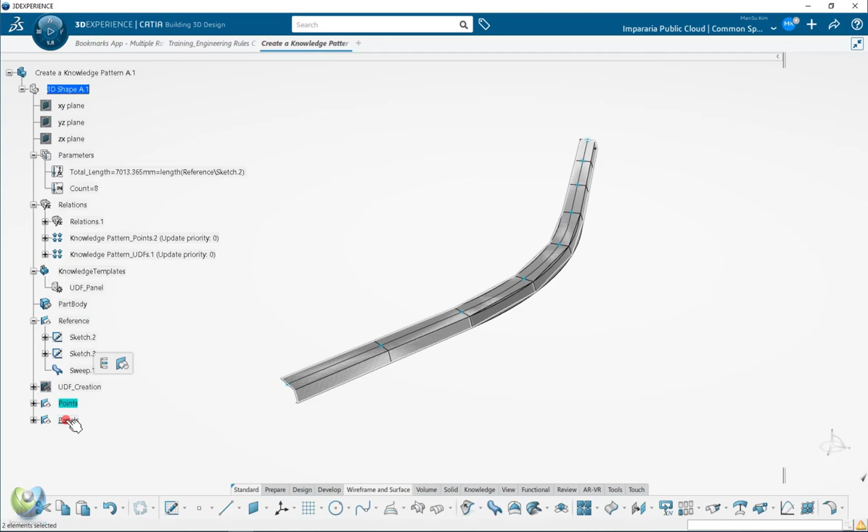Today's topic is about how to use knowledge pattern with the fundamental theories. So let's get started. Actually, I already made this to explain how it works. So you see, once you have the inputs as a reference, let's say we have some panels by the guideline and some sections, and we can create the surface, which is kind of a mesh surface of the panels.

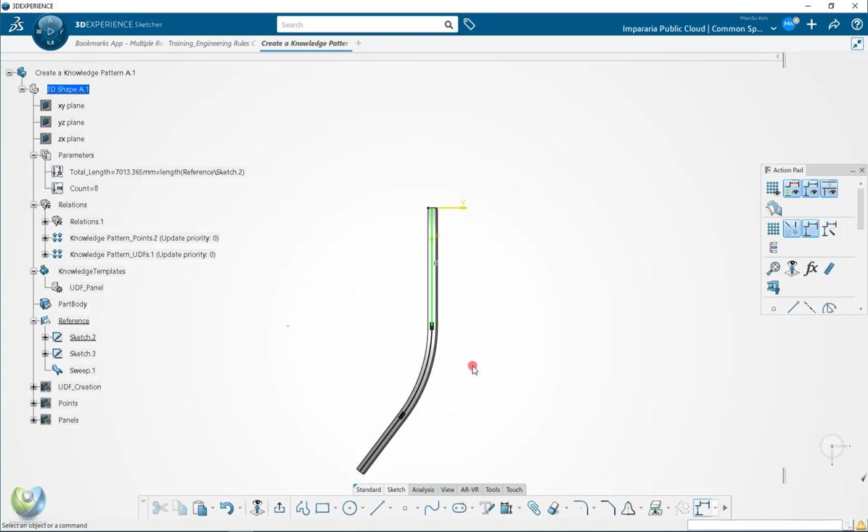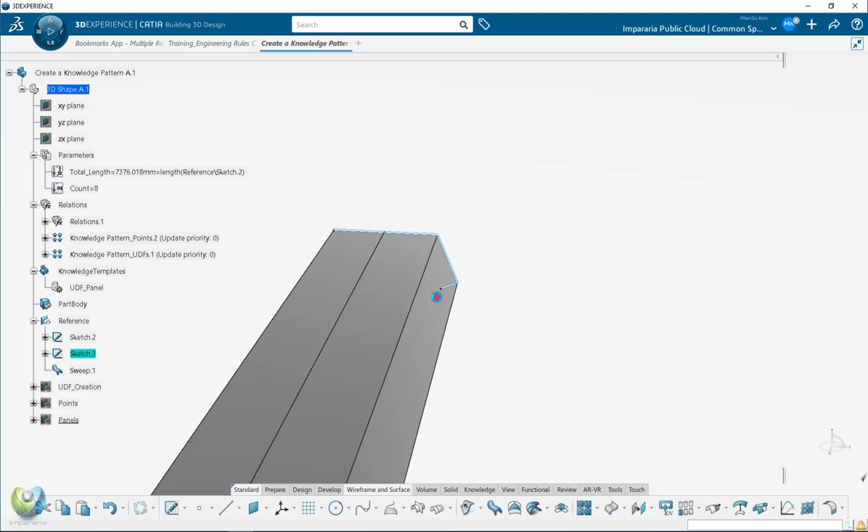And of course, it's parametric, so you can define or change it, and it depends on the project, your shapes. Also, you can bring it from somewhere as well. And you can, of course, change the sections. If you have proper dimensions, you can put the dimensions and some constraints in 3D, of course. So I will just skip that.

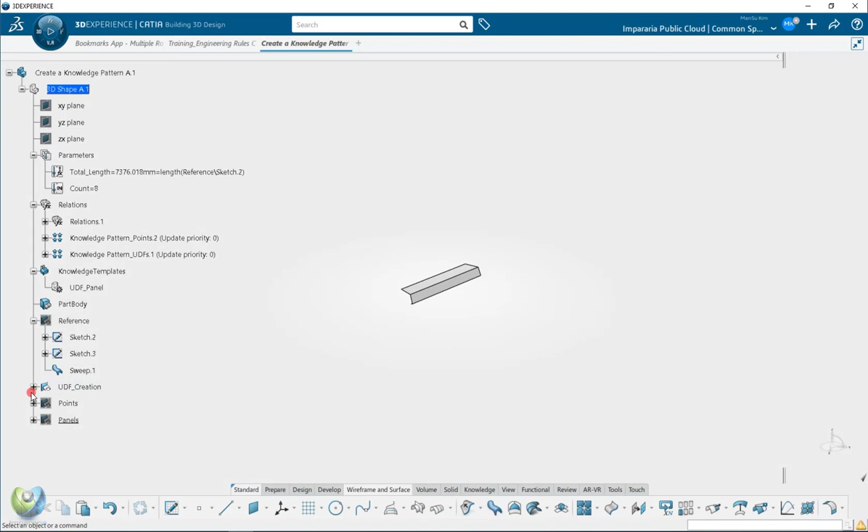Then now, let's say you have the reference surface and the guideline and the section. We start from here, and now you're creating the user defined feature, which is using the inputs. The inputs in this case, for creating this segment panel, we will use the surface and the curve and two more points. So we need to have these two points. It depends on the position. We will keep changing, then update.

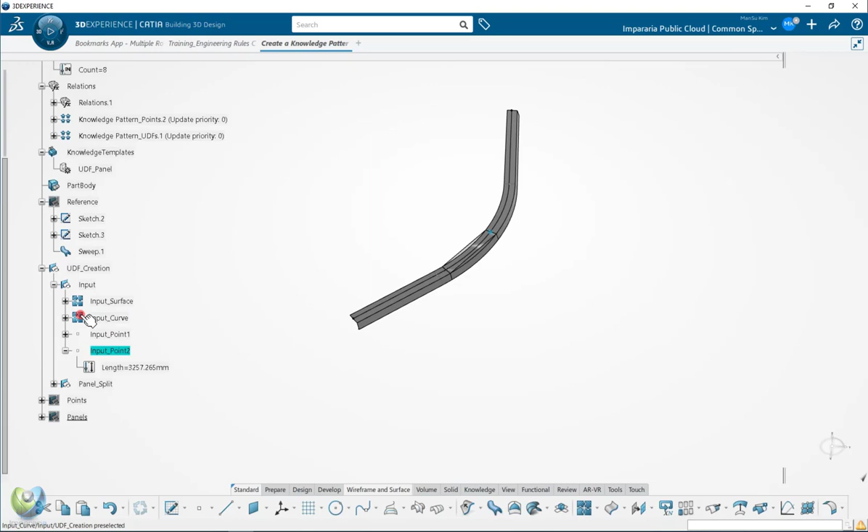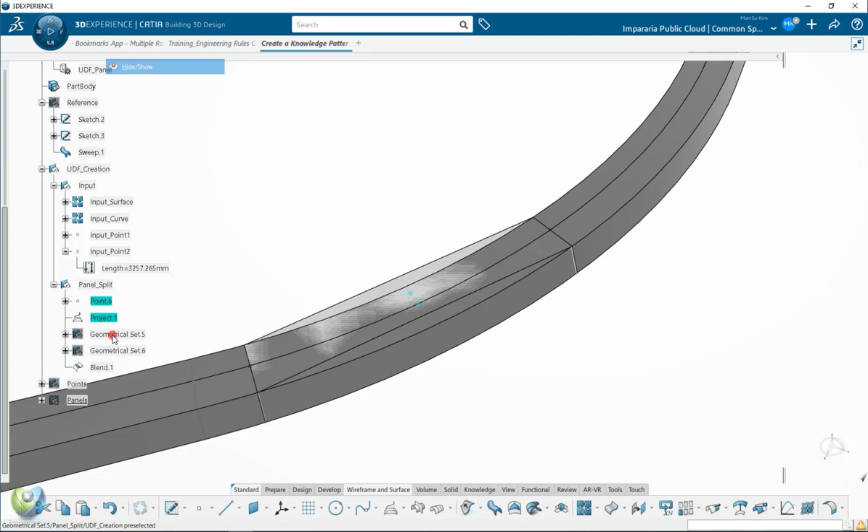So this is input, and from the input we're creating, let's say from here, in the middle, we have an input curve. Then we can create the middle point and project on the curve. Then from here, for each place, you can create a small surface for the intersect line between surface and the face. Same thing at the ending point as well. Then now you have two intersection curves, and you can create the segment.

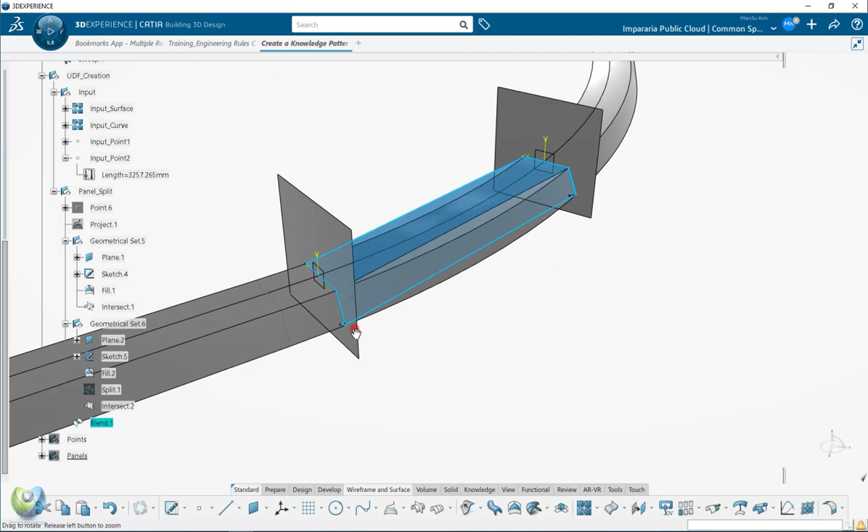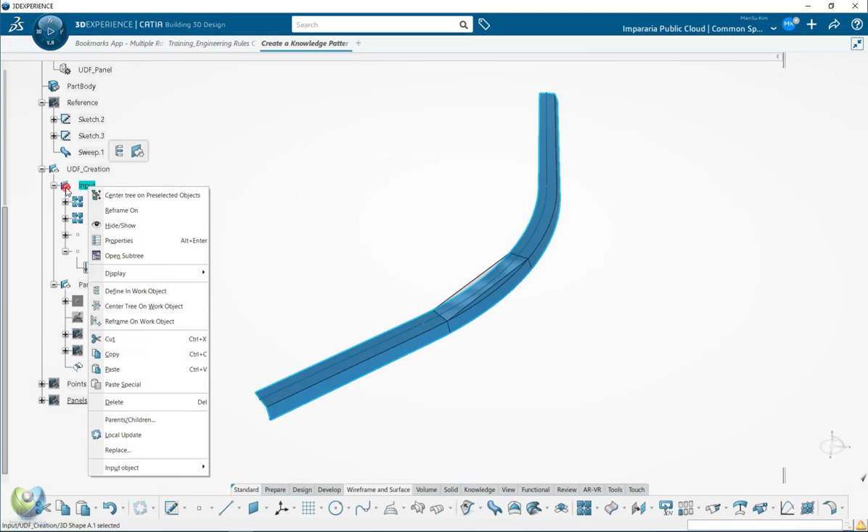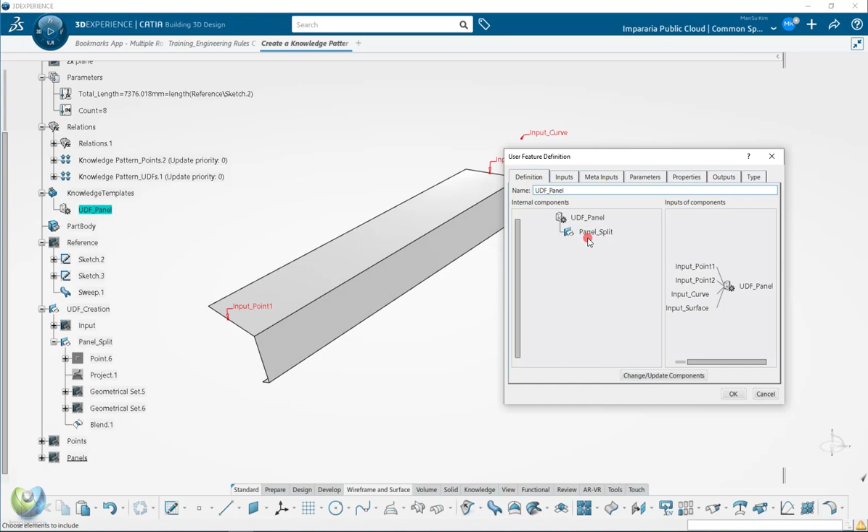Just finish with these basic simple shapes. Of course, you can create other wings, whatever you want, adding more and more. You can decorate more and more. For now, we do it with this kind of shape, and you can create the user feature. So the user feature looks like this. Once your user feature is complete, when you register, you will have the inputs, whose names we are going to use in our script. And output for now is only the shape of this result.

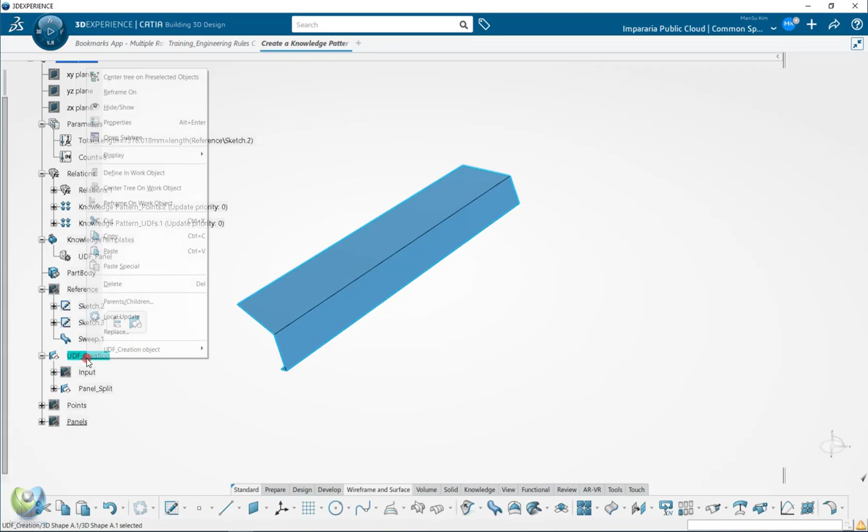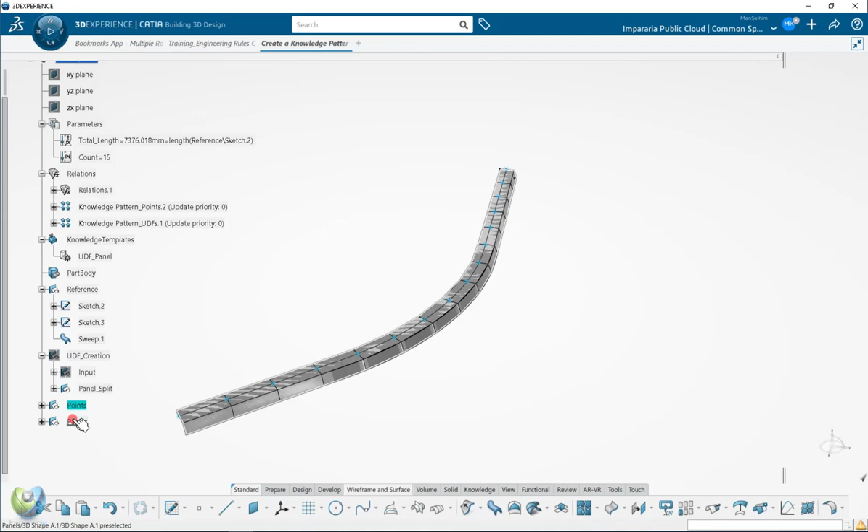Okay. Then now what happens here? I will hide this and show the reference again. Okay. Then whenever you change the count, you will create the points and you will create the panels. You see here, like that. So you can create the segment of each panel. Let's change it again. Okay, so now it's 8 panels, 1, 2, 3, 4, 5, 6, 7, 8, right?

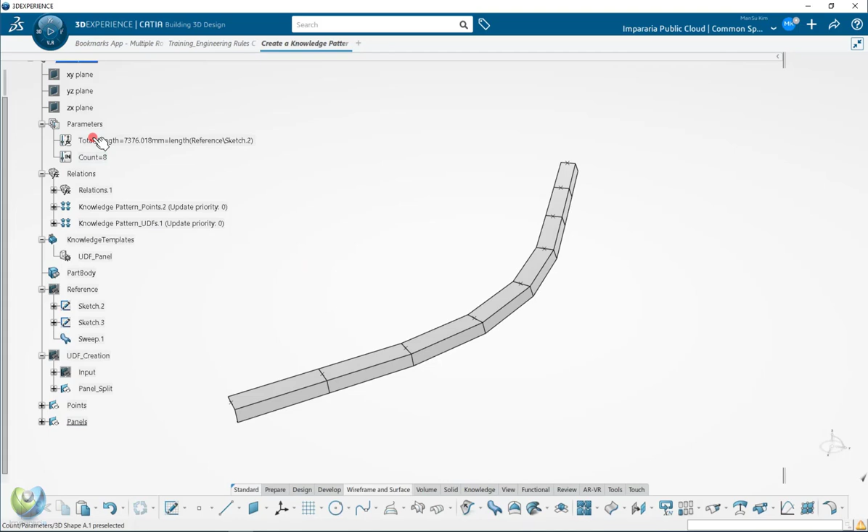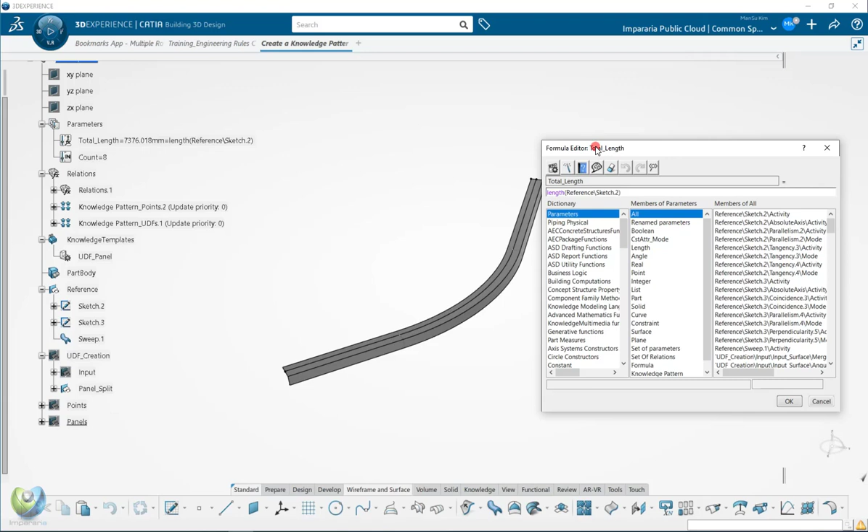So how did we do that? Okay, first, we need to define these two parameters. The first one is I want to measure the total length, because later I want to change the location of a point by the length. So total length you can create using the formula editor, like length with curve. So you can just say measure the curve length, and you can just double click it from the screen. Then this will capture it into the parameter.

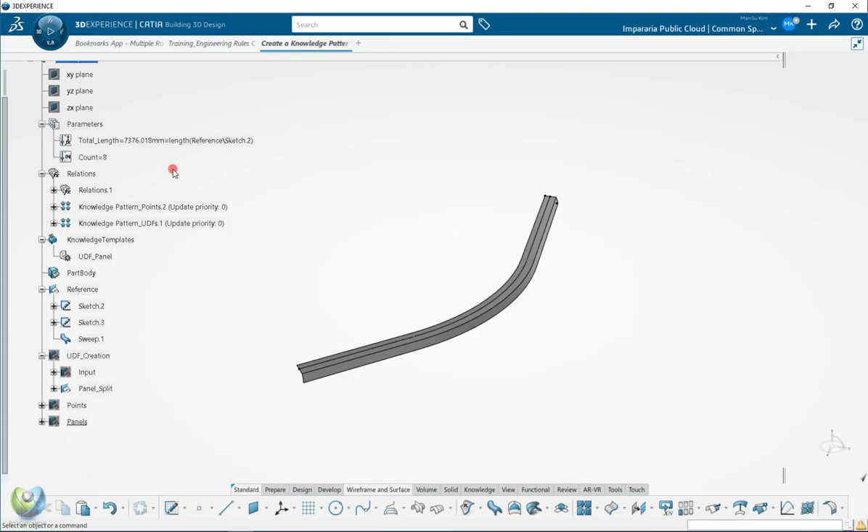Okay, so we put it here, total length, and then I want to control it by count. Of course, you can control it by length, whatever you define yourself. But in this case, I just create it as a count. So now we have a user feature and we have some parameters to control, and we are also creating the geoset to store our output points and panels.

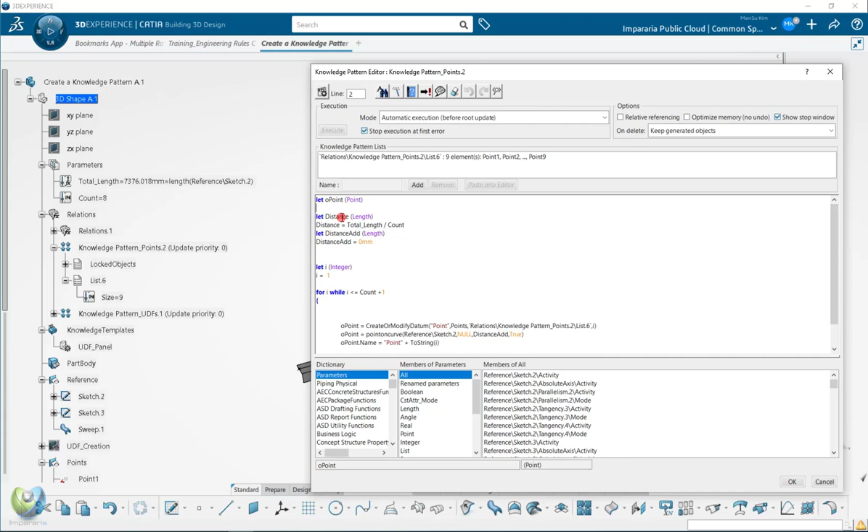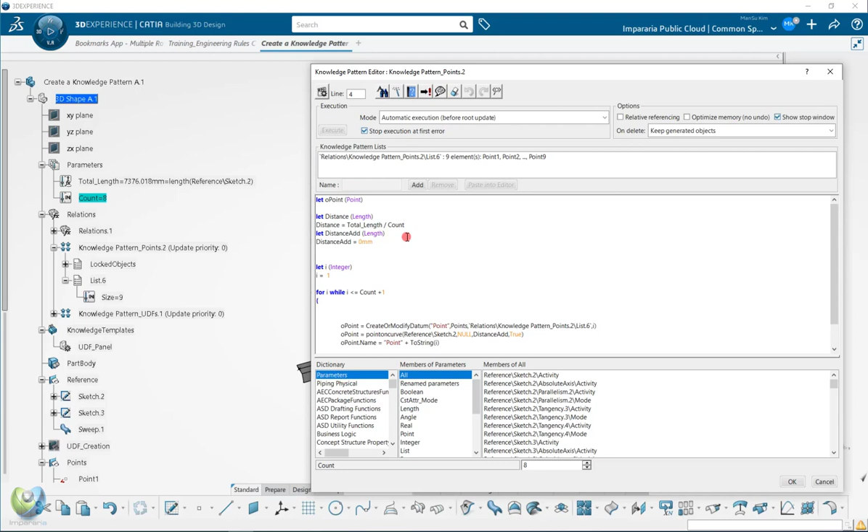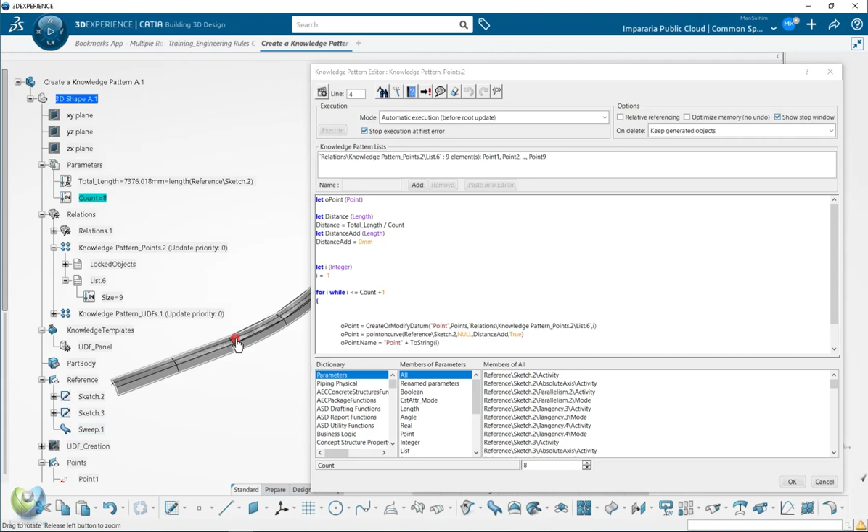Okay, so I created the knowledge pattern 2 times. So what does the knowledge pattern look like? Here I define point, because I want to keep the point moving. So I want to create the point first. The point distance, I define as the total length, which we defined already, divided by count. So you will have the distance of each span, and the first distance we are going to add is 0 millimeter. So starting from 0 millimeter, we'll continue adding the distance, so you will know at which position you will create the point.

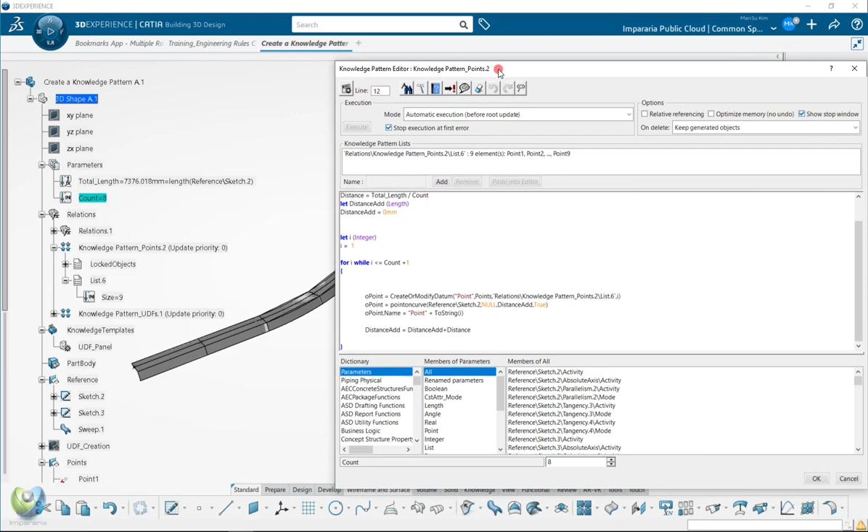Okay. Then now you define the integer. First as 1, and we repeat this loop until count +1. Because you need an additional point, starting point and ending point, there should be one more point. Then now you define by the function create or modify datum. You create the point, and you create the list also here. So while you create this output, your point will be stored in the list. Then you can use this list in another knowledge pattern, continuously working.

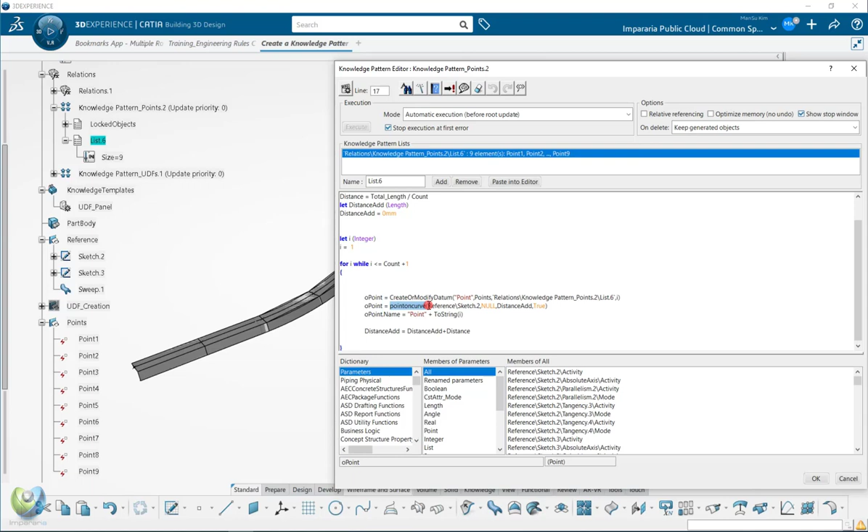Okay. Then now you can create the point. This is a theoretical point. Now you can create the physical point. So the point on curve function will allow you to create the point on the guideline, and the starting point is null, and distance add the first time is 0 millimeter. True direction, 0 millimeter. You can create the point here, and we can put the point name as point plus ToString(I). I is now 1, so the name of the point becomes point 1.

Then now I want to increase the distance add, which you are using here, because I don't want to create the point at the same location. I need to have a distance. So now distance add equals distance add plus distance. So we need to keep adding the distance to distance add in each loop. Okay. So now it's done, and to update automatically, you need to set the automatic update.

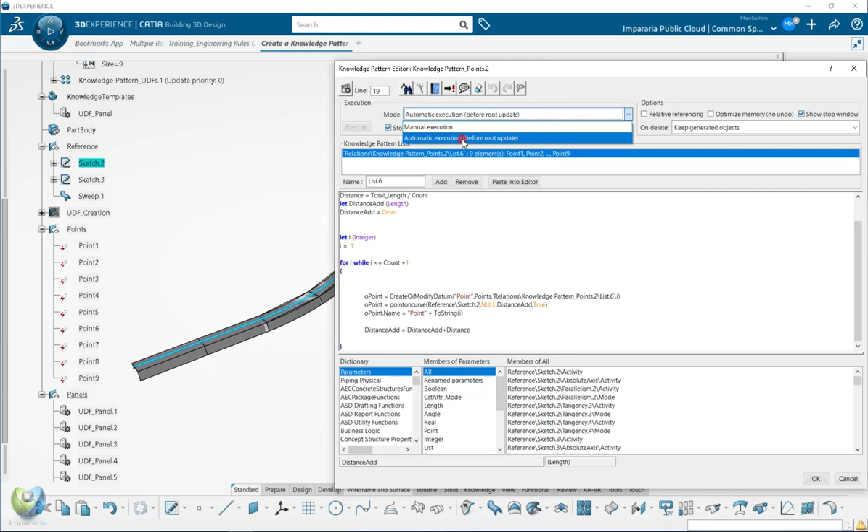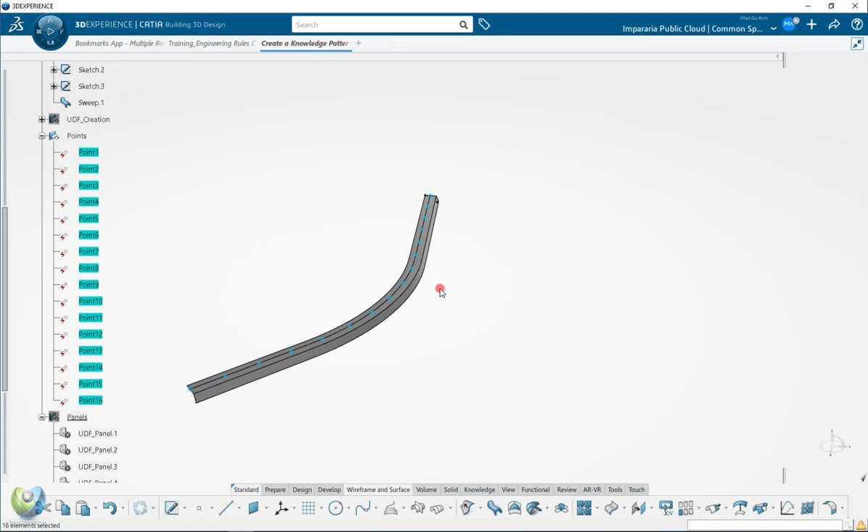That means, what does that mean? Whenever you change and an update is needed for this knowledge pattern, this will update and recreate these points. Of course, when it's reduced, it will be reduced, and if the count needs to increase, this will increase.

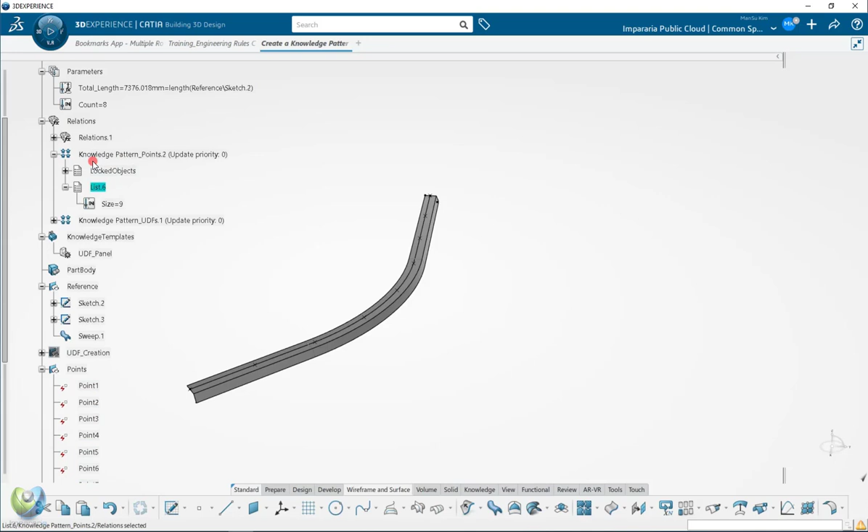But the connectivity for the next step is still working. So this is how we control the knowledge pattern, the points. And in the next step, we want to use these points to instantiate the panels.

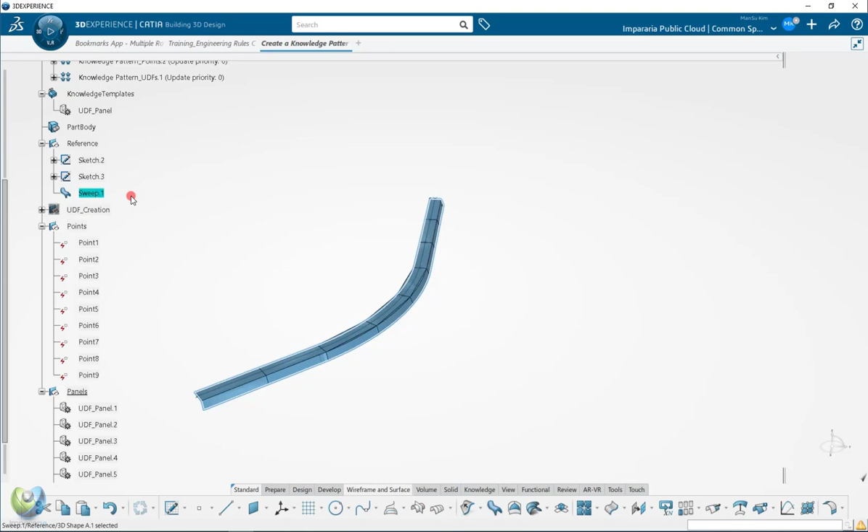So this panel, we need to have 4 inputs, if you remember. The first input is the guideline, the second input is the surface, the third input is point 1, and the fourth input is point 2. So imagine that this will be the first panel, this will be the second panel, and this will be a third panel, and so on until the end. So this is the theory. We want to instantiate our user feature template.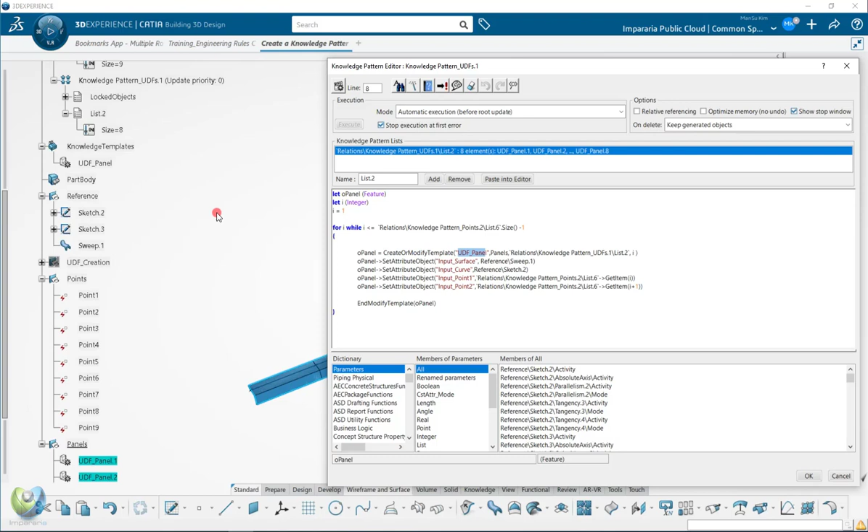So you would continue to 9, but this time you need to remove one time, because the last time is the second set and you should be finished. So I put -1 here. So it's not 9 times, but it will loop 8 times. And for the panel, use this function, create or modify template. So we're going to use the UDF panel, which is here, and we store it in the list here, and I, which in the list is the I count. So the first in the list will be the first UDF, the second will be the second UDF.

Once you define a panel, now it's time to set inputs. So panel set attribute object: surface, curve, point 1, point 2. So we know this one is this one, and the guide curve is this one. And now the point. This is the important part. The point comes from this list. We don't want to click directly because this count will change and disappear. Instead, we use the list and get item I. So I means the first time is 1, and the second time it will be 2. So it will increase.

And as the last input, point 2, that will be the same, from get item I. But in this case, I want to increase by one more point, so it will be the second input. So first input, second input. The next loop will be the first input, second input, like that. So it repeats like this. After finishing your template, we comment the ending of the template. That's it.

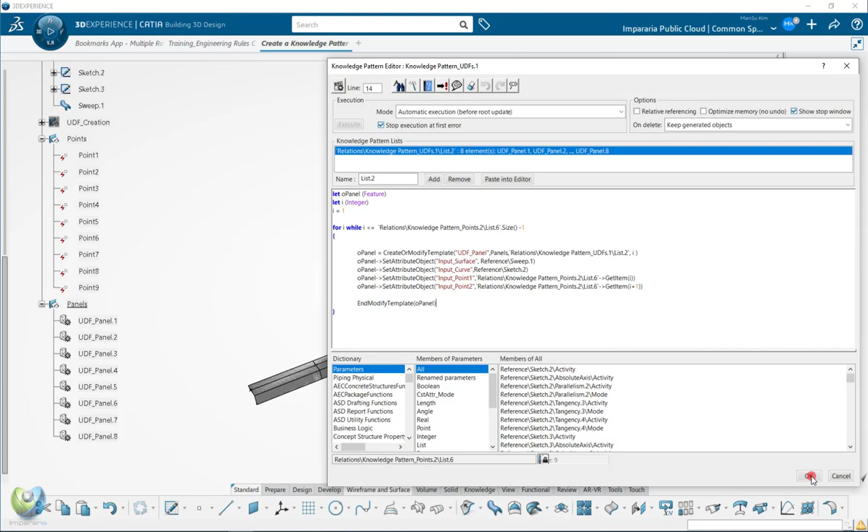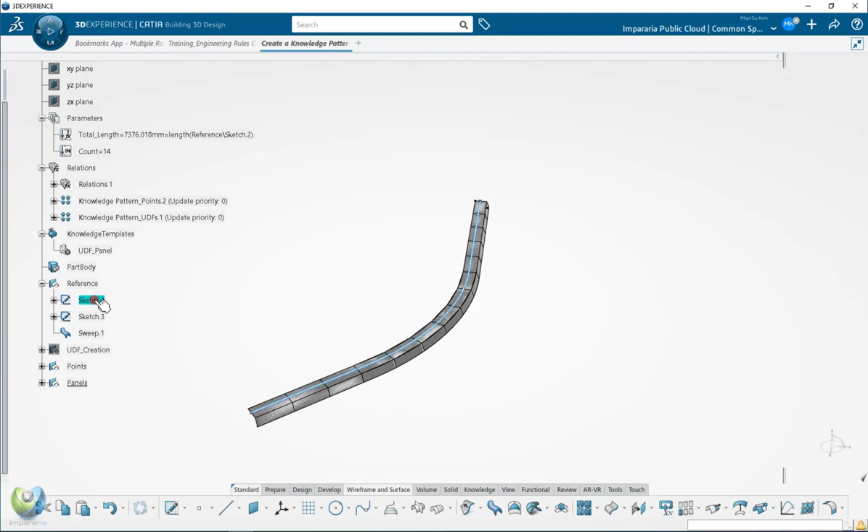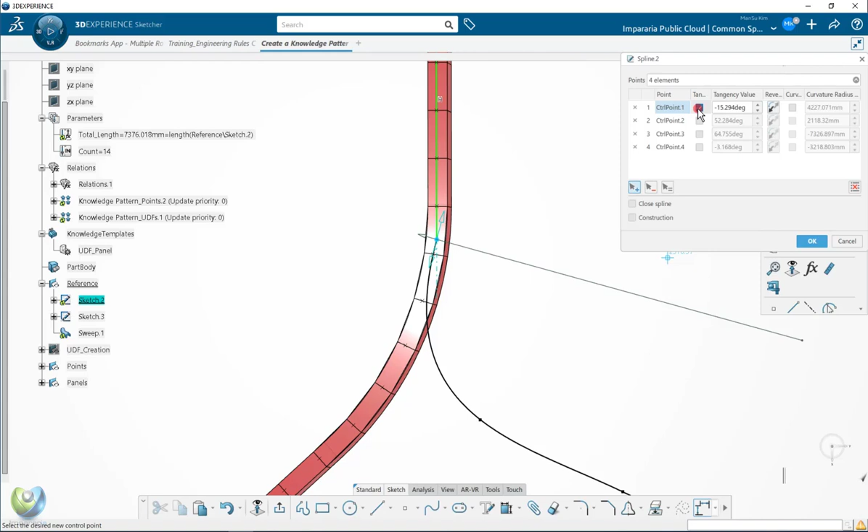Now you can change the count, and you can, for example, change the guideline to a different shape, or you can even recreate it. I will make some irregular shapes. I just want to make sure this is tangent. So I double click, and you can create the tangent line. Then you can make the coincidence between two lines, this and this, and the parallel. So now you can create the shapes.

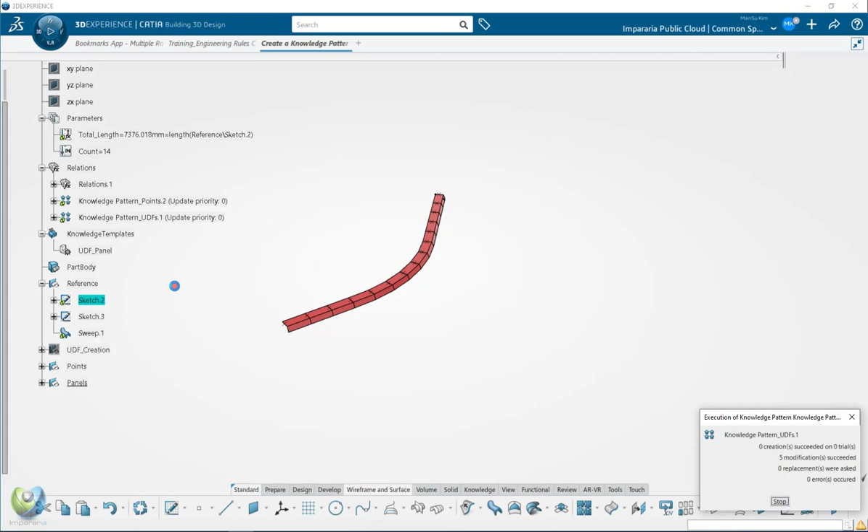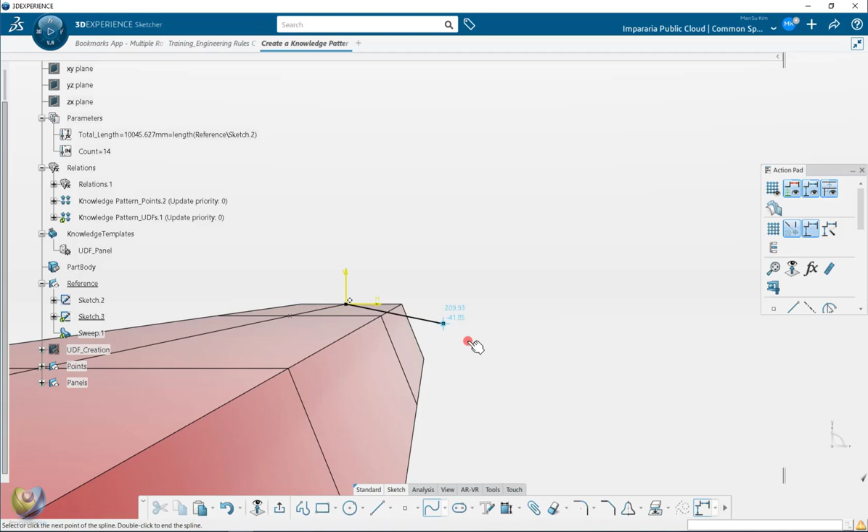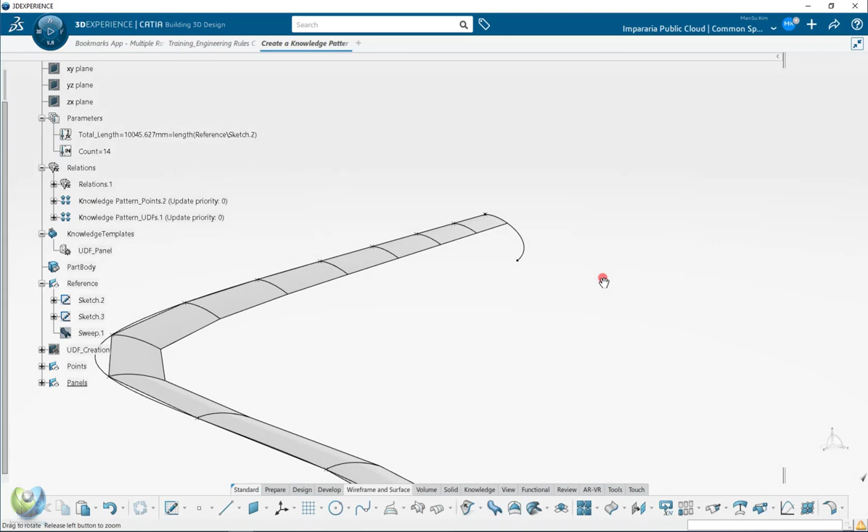Once you need to update, this will automatically update all the outputs like that. And you can also change the section, of course. Let's try a totally different shape, this kind of shape. In this case, I'm making two big sections since it's only until here. So now it will be a good chance to see how to update your user feature. So let's look at the user feature.

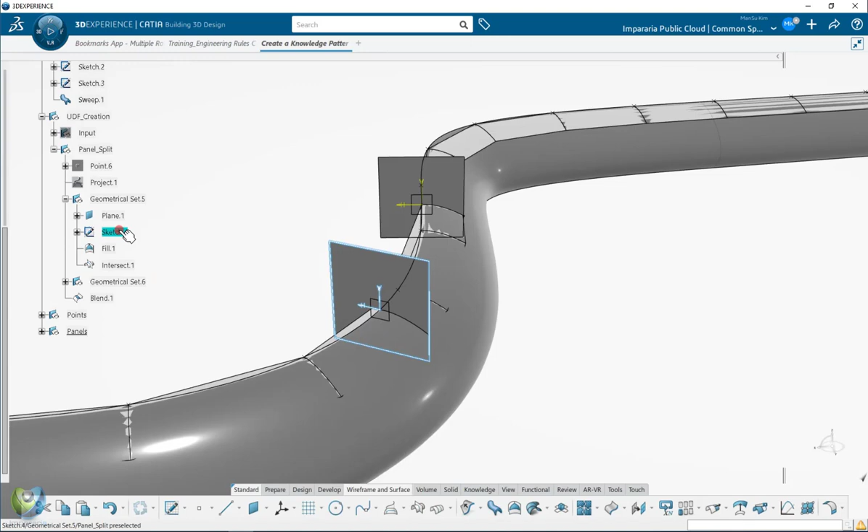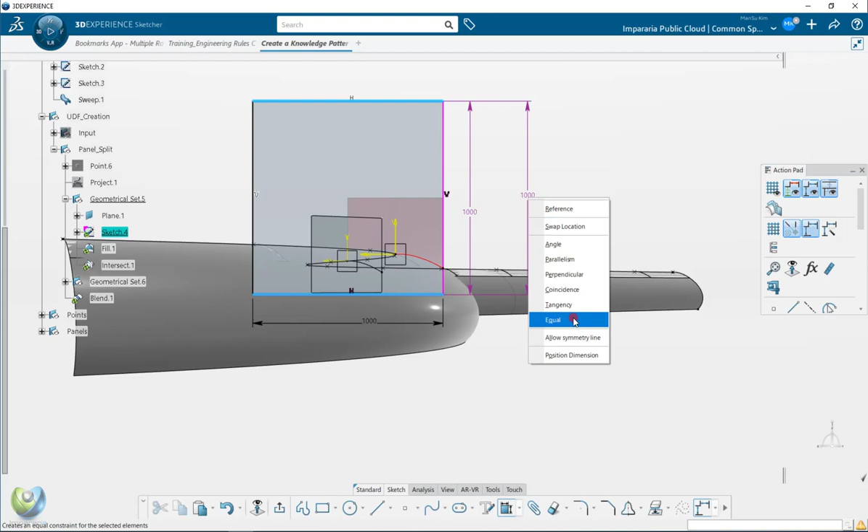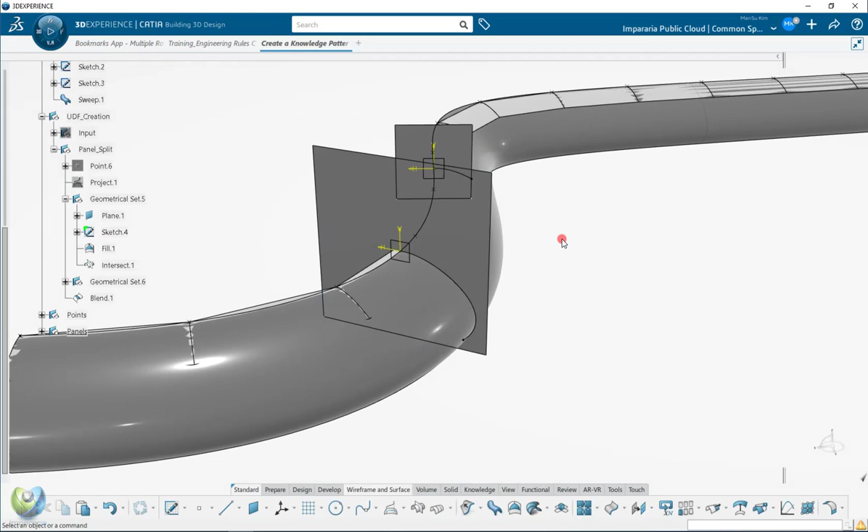And it seems this coverage is not enough. So I will modify it a little bit more. Instead of 500, I will make 1,000. And then I will also make a symmetry. Okay, so this size will cover, and here too. Symmetry. Symmetry.

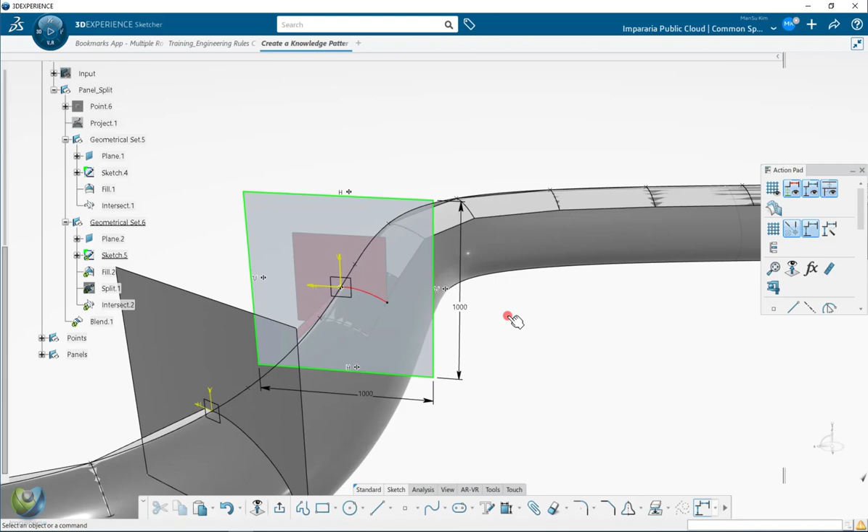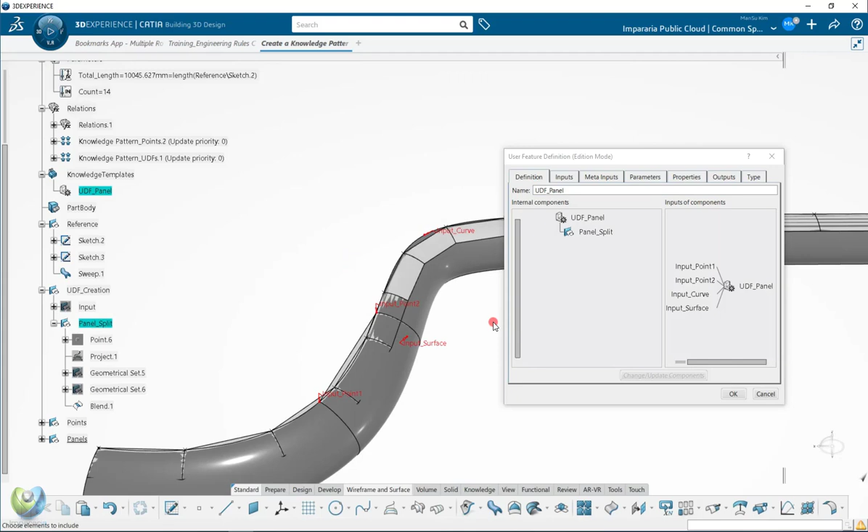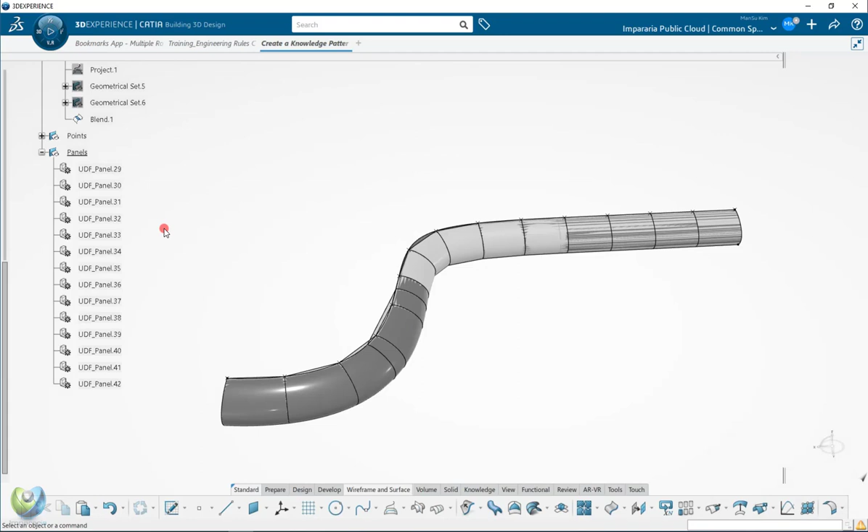So now the shape covers everything, and then we need to update the UDF. So change and update your component, and then click OK. Now the UDF is updated. Now you just need to repeat the UDF. All you need to do is delete. Then, because of the automatic update, this will be recreated by the knowledge pattern. So the result looks like this.

That's all for today. I hope you get an idea of how to use CATIA and EKL for getting started. This way, you can create your repeatable tasks and reduce your repetitive work.